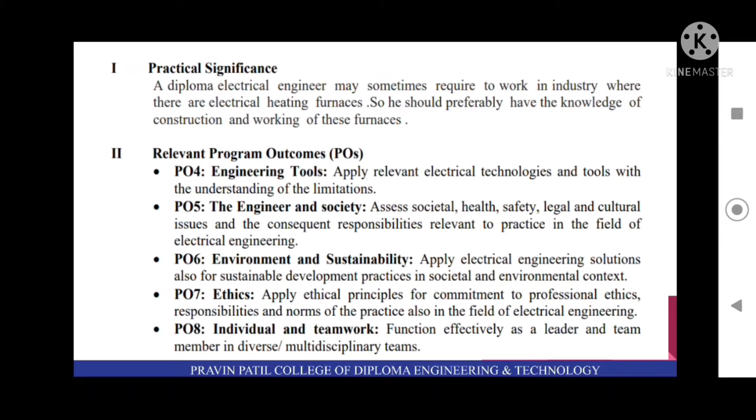Third one is competency and skills. This practical is expected to develop the following skills for the industry identified competency: maintain different types of electrical utilities and systems, identify the type of heating furnace.

Identify different components of heating furnace, know the function of above components and follow safe practices. Fourth is relevant course outcomes, which is maintain different electric heating and welding equipment.

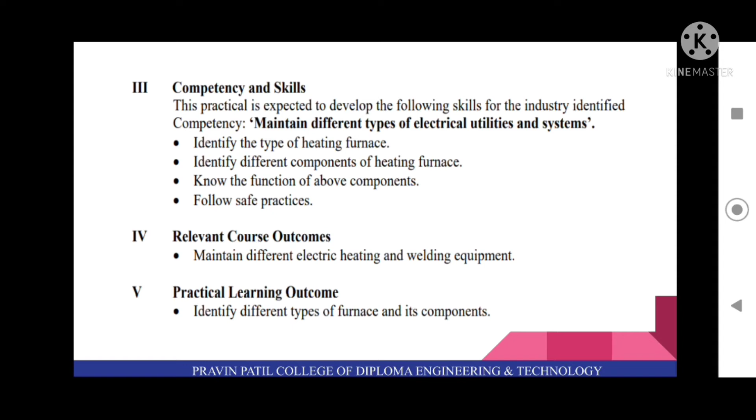Next is practical learning outcomes, which is identify different types of furnace and its components.

Next is minimum theoretical background. Two types of arc heating furnaces, which are direct arc heating furnace and indirect arc heating furnace. Two types of induction heating furnaces, which are core type induction heating furnace and coreless induction heating furnace.

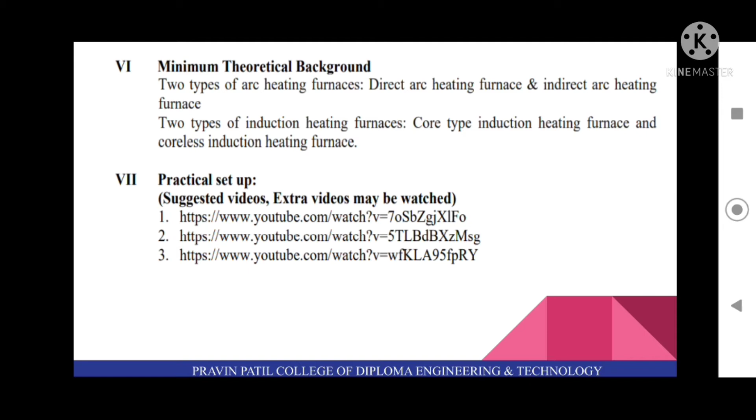So practical setup for these practicals are suggested videos. They have given some video links in your manual and you have to watch these videos.

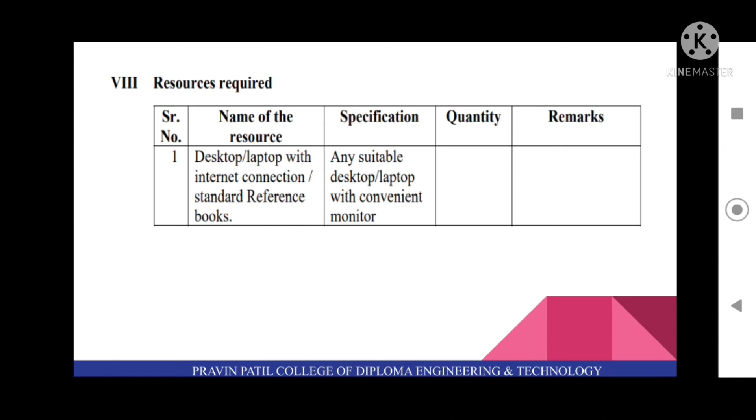Practical resources. So for this practical you have to require, first is a desktop or laptop with internet connection, or standard reference books, and specification, any suitable desktop or laptop with convenient monitor.

Next is precautions to be followed. First is all videos should be viewed from authentic sources, that is secured sources.

Procedure for this practical is first, switch on the computer. Second, confirm access to internet is available. Third, browse the search engine, say Google or YouTube.

Fourth, type the above mentioned site address for videos in the search column and press enter. Fifth, watch the videos carefully. Sixth, draw a labelled diagram of any three types of furnace.

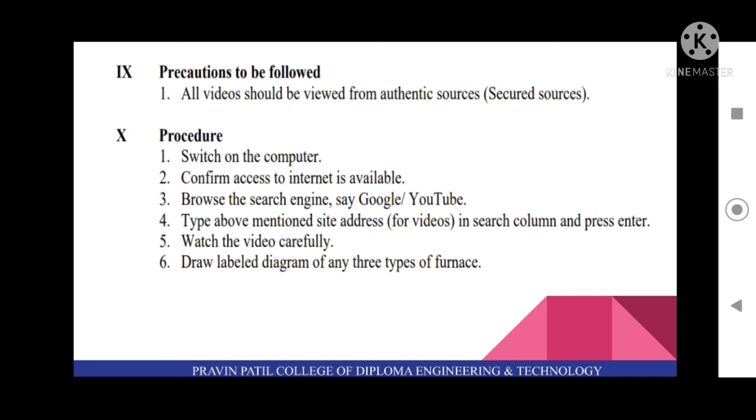So in this practical you have to watch some videos and then you have to write the diagram of three types of furnaces.

So in this practical you have to write the observation as follows, like name of the furnace. First is resistance furnace, and specification is power, which is 10 to 6000 kilowatt, hot zone length which is 50 to 600 mm or customized.

And you have to draw this diagram of a resistance furnace.

And you have to write applications, which are drawing and hardening of steel, heat treatment of aluminum and light metals.

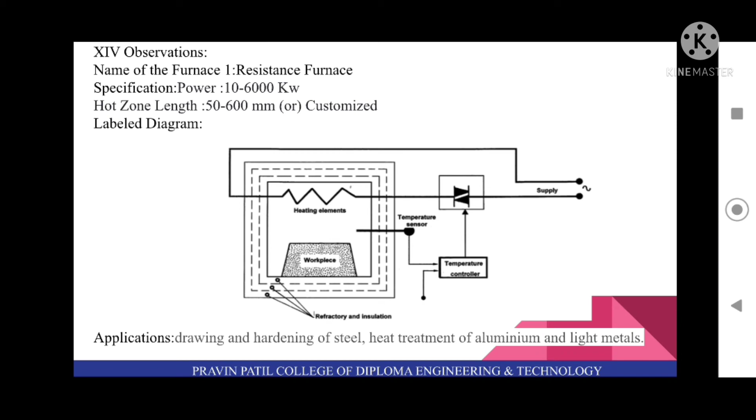Next you have to write another name of furnace, which you can write as Ajax Wyatt furnace. The specification of this furnace is standard size from 60 to 300 kilowatt, and supply single phase 501 hertz for standard up to 600 volt.

Next you have to draw the diagram of Ajax Wyatt furnace in your manual and write down applications, which are: these furnaces are widely used for melting and refining conducting materials such as brass, aluminum and other heavy non-ferrous metals.

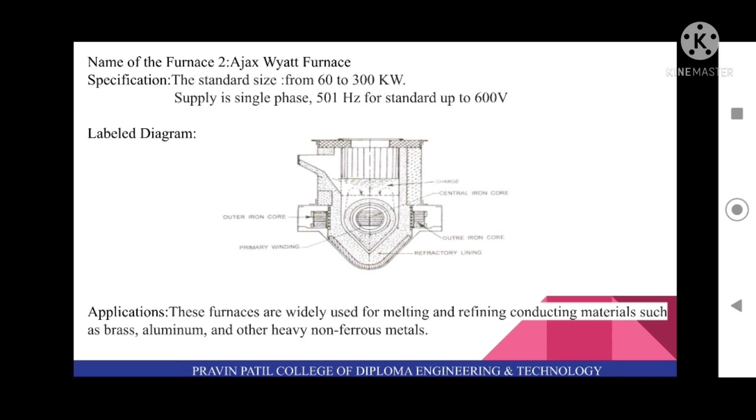And next you have to write down the result and conclusion for this practical.